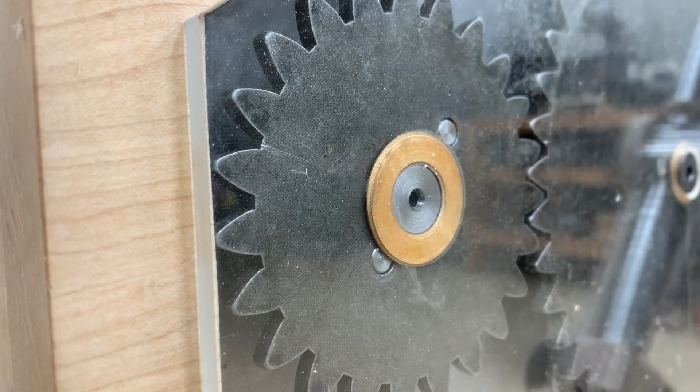So probably the most significant problem that Kevin ran into with the vise was this outside washer. On the vise I sent Kevin, well, that fell out, and you can see on mine it's not hanging on by a whole lot. It needs to be there to be a spacer between the front plate and the gear, but I've decided this is kind of a fundamentally not so great design, and I'm going to make a change.

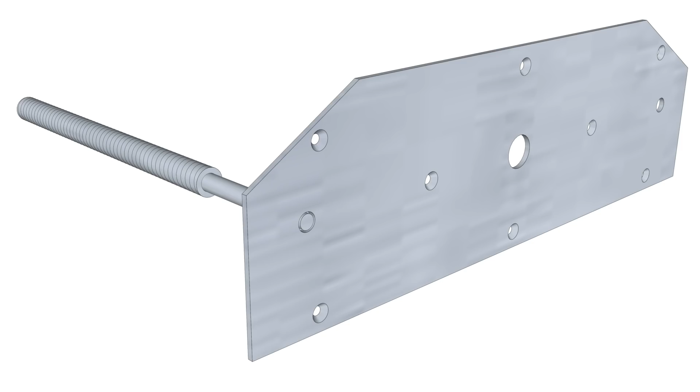So what I'm going to do is have a through hole on the front plate of the vise, have the shaft of the 2 outside screws stick out just a little bit farther, and then have a flanged washer. The flange on that washer will do the same spacing as the simple washer did in the previous design, but it will also help align the shaft and couple it to the front plate and make the whole thing a little less prone to racking.

So it's a design that's less prone to errors, and it's a little easier to put together. That washer's never going to fall out of place, and it makes the vise a little bit more rigid. So I think I'm going to go with this. So sorry about that, Kevin. And sorry to the other 4 people if you run into this issue. That's being a guinea pig, I guess.

So the other issue, Kevin wanted to put center dog holes in his vise. Now you see on my bench, I only have dog holes on the sides. So a center dog hole wasn't something I was really thinking about, and this bolt that goes right here goes to almost the back of the chop if you make it this thickness, and it was interfering with the center dog holes he wanted to place.

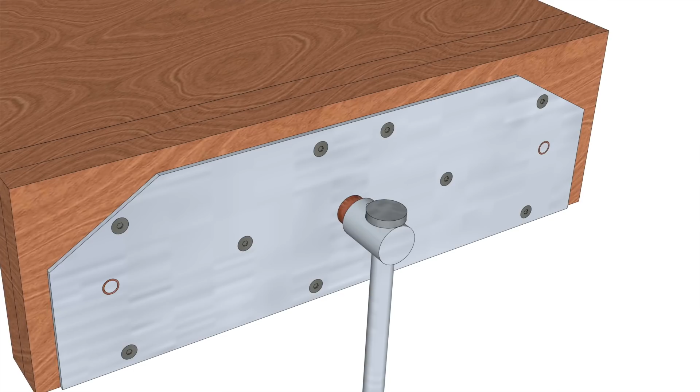So I could just tell people if they want a center dog hole, just make the chop an inch or an inch and a half thicker. It's not a particularly elegant way to solve the problem. It'd be pretty easy to just get rid of the 2 center bolts and have 4 bolts with the center left open so that area is free for a dog hole.

But honestly, I just took the 2 center bolts out of my vise, and even with the plexiglass on the front, which is less rigid than the steel, yeah, it flexed a little bit, didn't affect performance in the least. So I might just be able to get rid of those 2 bolts and not even worry about it. So that's kind of where I'm leaning.

I'm going to leave them off my vise for a while, just see if I run into anything. I don't anticipate any problems. It's rigidly held to the back plate and to the chop with other bolts, and they seem to be completely sufficient. So maybe I'll just get rid of them and nobody will have that issue.

And lastly, Kevin makes a serious effort to try to convince me to do some kind of a handle for the vise that's similar to the Veritas, or even kind of similar to the Benchcrafted concept where I have the wheel. And there's a couple advantages. First of all, if it's what you're used to, you're just going to like it better, which isn't the case for me. I'm more used to a style like this.

But if you're used to something like the Veritas or the Benchcrafted with the wheel, and you want something with a knob you can turn, that's what you're going to be more comfortable with, and some people are going to be in that boat. And there is a bit of a speed advantage because you're making a smaller circle than if you're gripping the vise here and making a larger circle.

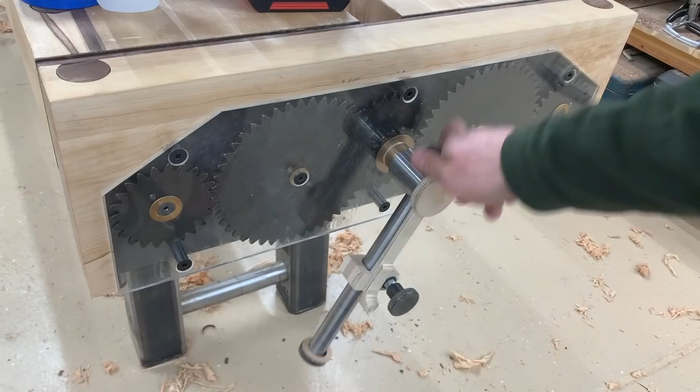It allows you to have the handle in both the standard position with the full long torque arm, and it holds it rigidly in the middle with a knob that you can turn for a quicker rotation. So I came up with this. Now don't get too hung up on exactly what it looks like. This is just a concept prototype that I whipped up in an hour. But it worked, and it allows for that kind of functionality. It's an add-on piece. You don't change anything about the vise.

It can hold the handle in the center position for a quick rotation, or you can move the handle all the way to one side and have the longer torque arm if you need that for some operation. So this is kind of what I'm going with. I'll have it as an option, an add-on that you can buy if you want, but you don't need to spend the money on it if it's not something you're interested in.

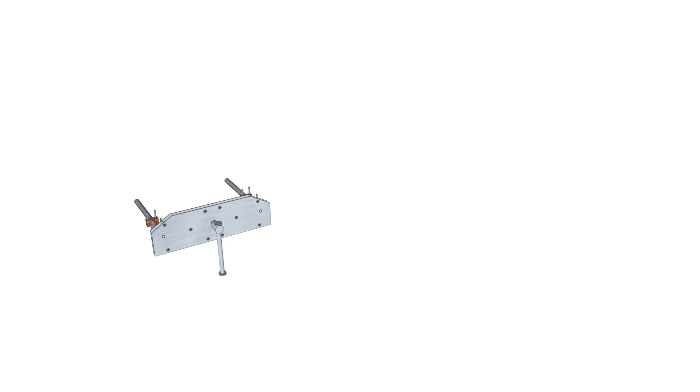Okay, next let's talk about price a little bit. A lot of people are asking me how much it's going to cost and when's it going to be available. We'll get to that too. As far as price, there's going to be 3 versions of this vise. This version that you're seeing right here is 20-inch spacing between screws. I'm also going to have a 24-inch and a 14-inch to be more of a large non-racking front vise, which I really like that concept.

This bench is going to have the 20-inch and the 14-inch, by the way. And the prices for those, these aren't written in stone, but I'm thinking $300 for the big one, $280 for the 20-inch, and $260 for the 14-inch.

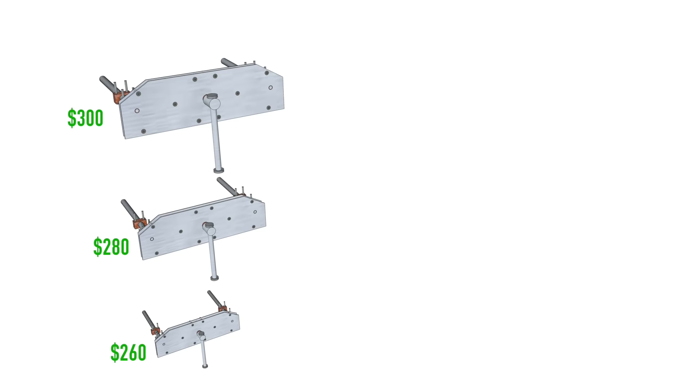These prices represent as lean a profit margin as I can possibly get away with, and boxes me into only doing direct sale. I'll never be able to cut a retailer in at these prices based on how much it costs to make the Vise. So really trying to keep it as affordable as possible if you just want to get in with base Vise. And remember, all 3 of those do include the 2 pieces of rubber.

In addition to that, I'm thinking of doing a number of add-ons. Now, the clear front has been super popular. Kevin made his own clear front, as you saw from his video, and I should have anticipated this. It's fun to watch gears work. Products that have gears in them tend to go the route of having clear windows to watch the gears operate, like watches, for example. Lots of watches have a clear back so you can watch the gears.

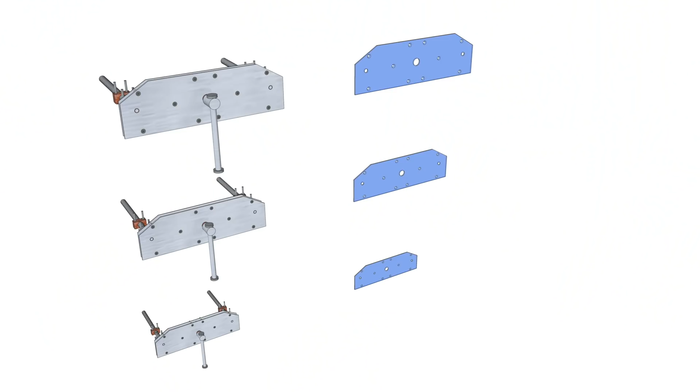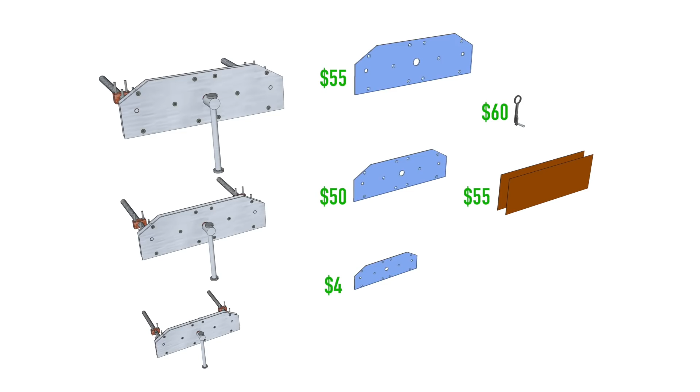They're cool to watch. So I'm thinking of selling an optional add-on product for people that don't want to make their own, which you can certainly do, a clear front for all 3 sizes of the Vise. And the prices there will be somewhere around the order of $55 to $45 for big to small versions of that clear front plate. And then in addition to that, I'll sell the lining separately for $55 and the center turn handle for $60. These are probably going to change a little bit, but that's what I'm targeting. This is my best guess for what prices will look like.

And the prices for the add-ons, there's a little bit more profit margin in there for me, just to be frank. You can get the base Vise for just the cheapest price I can offer. If you want to do the add-ons, it costs a little bit extra as far as the markup that I'm taking, and I make a little bit more money on those. Just what I'm thinking for the retail model.

Now, as far as when the Vise will be available, it's going to be a couple months still. I had mentioned the economies of manufacturing scale; I need to make quite a few sales in order to really kick this off. And the people that got the Vises need to make their videos in order for me to get enough volume to actually sell enough Vises to get this going. I might be able to sell 40 or 50 on my own. I'm just kind of guessing here. But that's just not enough.

I need to be in the hundreds in order to place an order big enough that my scale economies leave enough margin that I can buy a little bit extra and make a few more sales and really get this going. So, long story short, I'm kind of waiting on the people that I sent the 4 other Vises to get more interest going. And some of them are building workbenches specifically for the Vise, and that's not a fast process. So it'll take a little time. I'm moving as fast as I can. I will have the lining available quicker than that. So stay tuned for that piece.

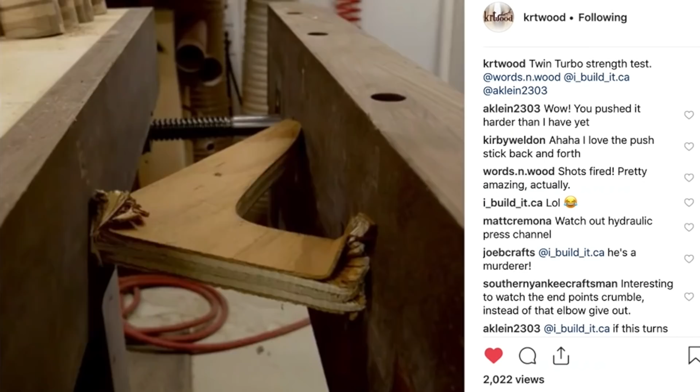Even though it's not really meant for crushing, it's meant for work holding. And if we're going to go toe-to-toe with other vises on crushing capability, this is going to lose. This is not built necessarily for crushing strength. Don't want to oversell it and make it something that it's not.